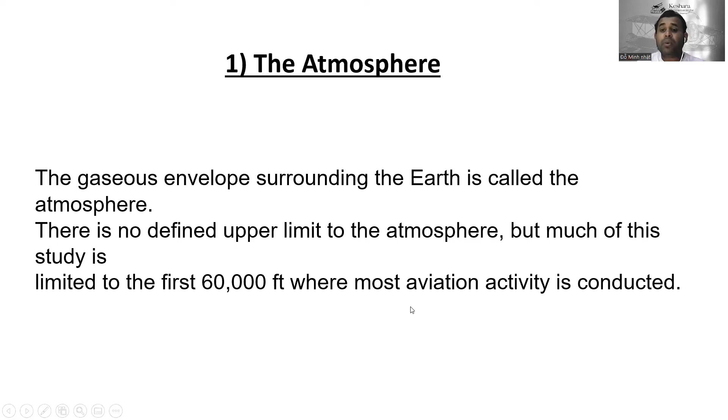So the gaseous envelope surrounding the earth is called the atmosphere. There is no defined upper limit to the atmosphere, but much of this study is limited to the first 60,000 feet where most aviation activity is conducted. Okay, so now number 2, gas composition.

The gases are found in the atmosphere in the following proportions by volume. For example, nitrogen is 78% in the atmosphere, oxygen is 21%, and other gases are 1%, for example argon, carbon dioxide, water vapor.

So oxygen is essential for the sustenance of life and the combustion of materials. In the context of aviation, oxygen is required for the combustion of fuel, and a deficiency of this gas results in incomplete burning and reduced engine efficiency.

So water vapor is present in the atmosphere in varying proportions and is responsible for the weather around the earth, which in turn affects aircraft operations and performance. Additionally, the presence of water vapor may cause icing of the airframe or engine, which may impair aircraft performance.

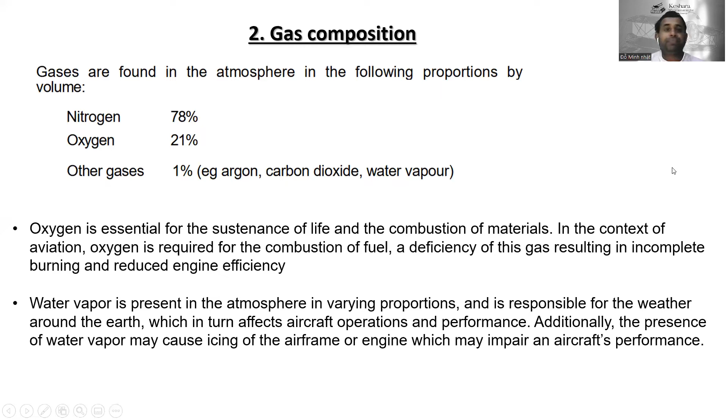Okay, so now the third one is regions of the atmosphere. The atmosphere is divided into several layers. The first layer is the troposphere, where the temperature decreases with increase of height. Remember, with increase of height, the temperature decreases. In this region, nearly all significant weather occurs, in the troposphere.

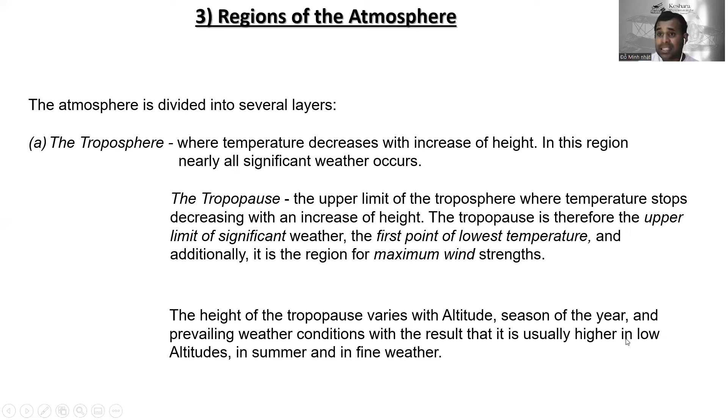So the tropopause is the upper limit of the troposphere, where the temperature stops decreasing with increasing height. The tropopause is therefore the upper limit of significant weather, the first point of lowest temperature, and additionally it is the region of maximum wind strength. The height of the tropopause varies with latitude, season of the year and prevailing weather conditions, with the result that it is usually higher in low latitudes, in summer and in fine weather.

Okay, so the typical heights for the tropopause are: this is the latitude and this is the tropopause height. At the equator, 16 to 17 kilometers, given in feet as 53,000 to 57,000 feet. At 45 degrees north and south, 10 to 12 kilometers. And at the poles, North Pole and South Pole, 7.5 to 9 kilometers, 25,000 to 29,000 feet.

And the second layer, the stratosphere, extends from the tropopause to approximately 50 kilometers AMSL. AMSL means above mean sea level, and it is characterized by the temperature being steady or increasing with height.

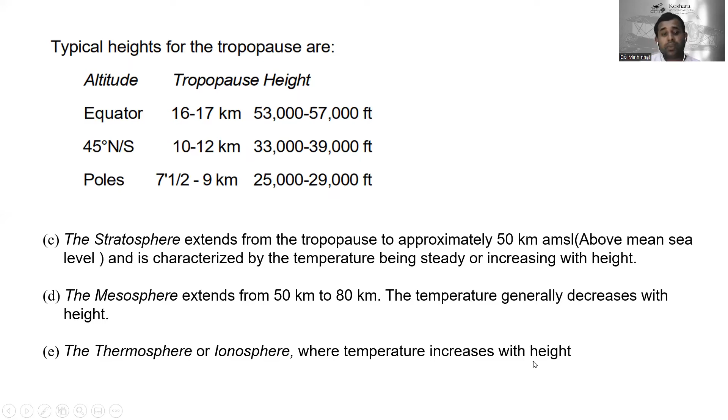So the mesosphere extends from 50 kilometers to 80 kilometers. In the mesosphere also, the temperature generally decreases with height. All right. So the thermosphere or the ionosphere, where temperature increases with height. Remember, in the ionosphere or thermosphere, temperature increases with height.

All right. So now we'll learn about temperature units. The temperature scales most used are Celsius or centigrade, Fahrenheit, and Kelvin or absolute temperature. The first two scales are based on the melting point of ice, being 0 Celsius and 32 Fahrenheit respectively. So 32 Fahrenheit equals 0 Celsius; that is the melting point of ice. And the boiling point of water being 100 Celsius or 212 Fahrenheit.

Being a form of energy, heat is related to the random movements of molecules in substances. If heat is reduced, the molecules become less active. The minimum temperature to which a substance can be reduced is approximately minus 273 Celsius, and this is known as absolute zero, or 0 Kelvin. Correspondingly, the melting point of ice is equivalent to 273 Kelvin and the boiling point of water to 373 Kelvin.

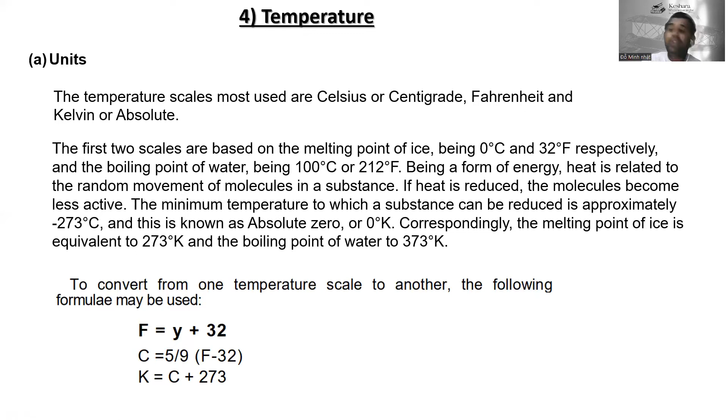So to convert from one temperature scale to another, the following formula may be used. If you want to convert Celsius to Fahrenheit, Fahrenheit to Kelvin, or Celsius to Kelvin, we can use this formula: F equals 9/5 C plus 32. To convert Fahrenheit to Celsius, C equals 5/9 times (F minus 32). To convert Celsius into Kelvin, we add 273. To convert Kelvin to Celsius, you subtract 273.

Next, temperature variations in the troposphere. At ground level, in general, the temperature increases with decrease of altitude, or with the increase of altitude the temperature decreases. With increasing altitude, the conductive and convective effects from the earth are reduced, so that temperature will usually decrease with height up to the tropopause.

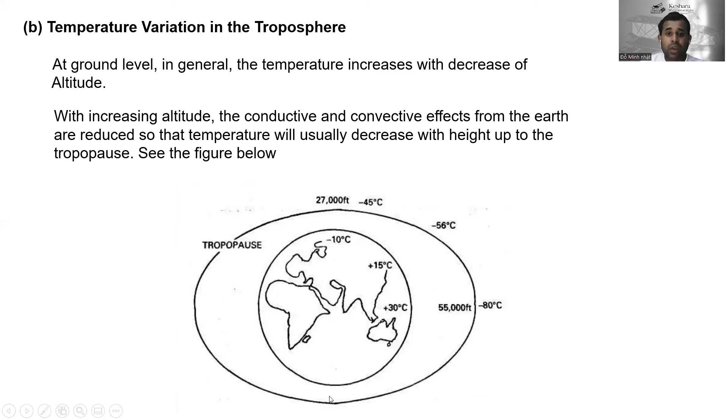See the figure below. This is the earth and this is the tropopause. Typical values of the temperature found at the tropopause are: at the equator, minus 80 Celsius; at 45 degrees north and south, minus 56 Celsius; and at the poles, the north pole and south pole, minus 45 degrees Celsius.

Therefore, there is a reversal of temperature with altitude in comparison to those found at ground level. This is partly because the tropopause is higher at the equator and the temperature decrease is effective over a greater height.

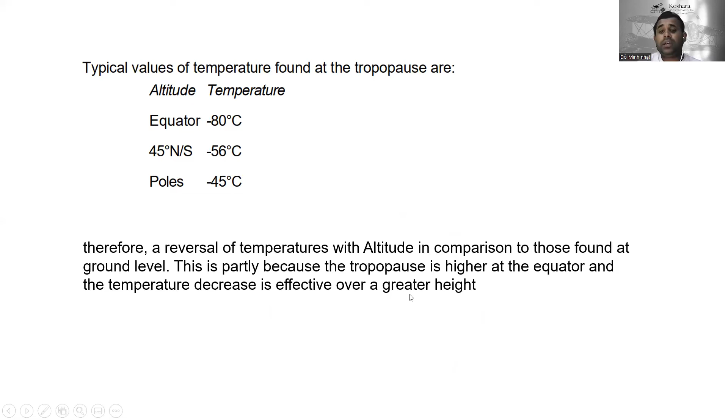Now let's go to the lapse rate. The temperature decrease with increase of height is referred to as lapse rate. It means when the height increases, the temperature decreases. A representative value of 2 Celsius per 1000 feet is a typical value for the troposphere, and this figure is used as the reference for the Jet Standard Atmosphere, JSA. The International Standard Atmosphere uses the comparable value of 1.98 Celsius per 1000 feet.

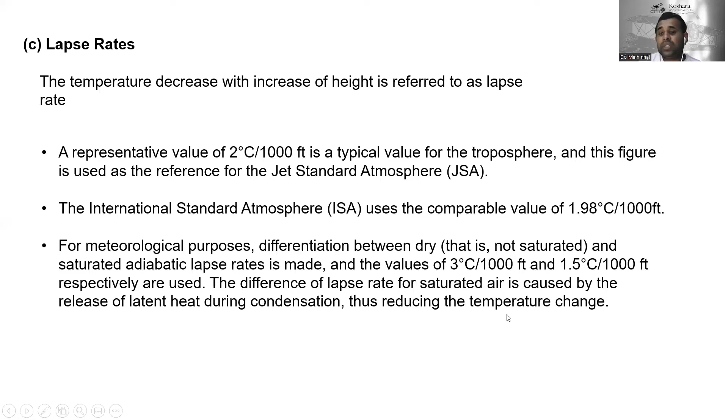For meteorological purposes, a differentiation between dry, that is not saturated, and saturated adiabatic lapse rate is made, and values of 3 Celsius per 1000 feet and 1.5 Celsius per 1000 feet respectively are used. The difference in lapse rate for saturated air is caused by the release of latent heat during condensation, thus reducing the temperature change. Just read these things, okay?

Alright, so next, temperature and aircraft performance.

Temperature and aircraft performance. At a given pressure, an increase of temperature results in reduction of density. Remember, at a given pressure means pressure is constant, and temperature increases. If the temperature increases, the result is the density decreases, right? It means the pressure is constant and temperature increases, then density is going to decrease, right?

So firstly, considering airframe performance, a reduction of density, this is the density, reduces lift, L. This may be counteracted by increasing the true airspeed, V, to achieve the required amount of lift. Okay, so this is the equation. CL means the coefficient of lift. So L means the lift, and this is the coefficient of lift, times half density times true airspeed squared times S. All right.

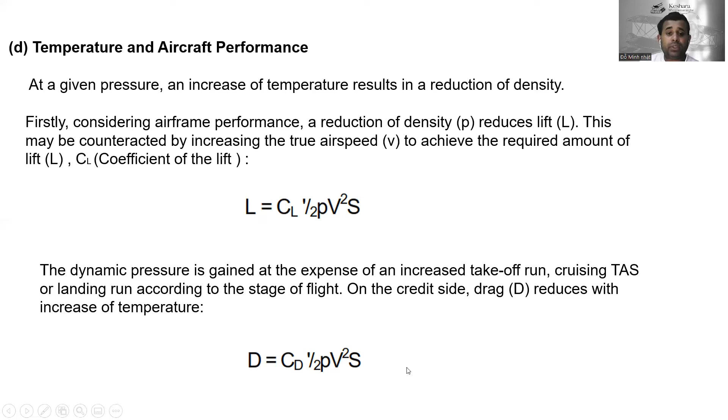So the next one is the dynamic pressure is gained at the expense of an increased takeoff run, cruising true airspeed or landing run according to the stage of flight. On the credit side, drag reduces with the increase of temperature. So this is the drag equation. So this is the lift equation.

A piston engine's performance is related to the temperature of the air being drawn into the cylinder head. The higher the temperature, the lower the density and the weight of the fuel-air mixture that can be burned in the combustion chamber. The power output of the engine therefore falls with the increase of temperature. Remember, the power output of the engine therefore falls with increase of temperature.

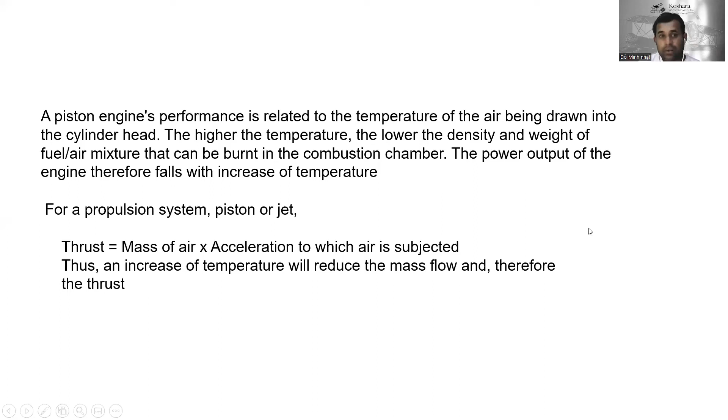Remember. For a propulsion system, piston or jet, thrust equals mass of air times the acceleration to which the air is subject. So this is an equation. Remember, thrust equals mass of air times acceleration. Thus, an increase of temperature will reduce the mass flow and therefore the thrust. All right.

Okay, so the next one, definitions, the pressure. Now we're going to learn the pressure. The definition is pressure is the force exerted on a unit area. In a unit area, the force exerted is called pressure. So the equation is pressure equals force divided by area. Force we can again split into force equals mass times acceleration. So the pressure equals mass times acceleration divided by area.

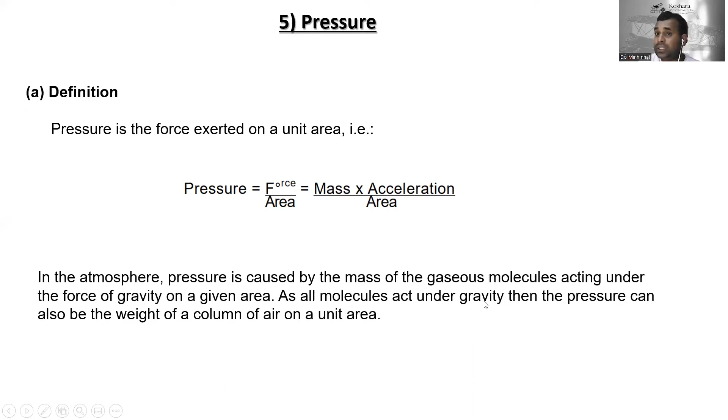So in the atmosphere, pressure is caused by the mass of gas molecules acting under the force of gravity on a given area. As all molecules act under gravity, the pressure can also be the weight of a column of air on a unit area. Alright, so this is the figure. You can see the unit area, the column of air. So this is the pressure exerted onto the earth, or the floor, right?

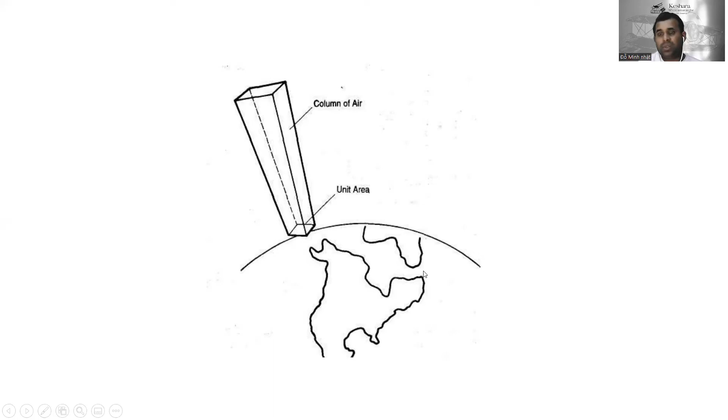So now the units. The metric units of pressure are dynes per square centimeter, where the dyne is the force required to accelerate 1 gram by 1 centimeter per second. The System International units of pressure are newtons per square meter, where the newton is the force required to accelerate 1 kilogram by 1 meter per second.

The newton is therefore equal to 10 to the power 5 dynes. Remember, 1 newton is equal to 10 to the power 5 dynes. Just remember these things. Maybe they will ask in the examinations, right? Although largely obsolete, the imperial system of units is still encountered and pressure is expressed in pounds per square inch. In meteorology, the unit of pressure is the millibar, which is equivalent to 1000 dynes per square centimeter.

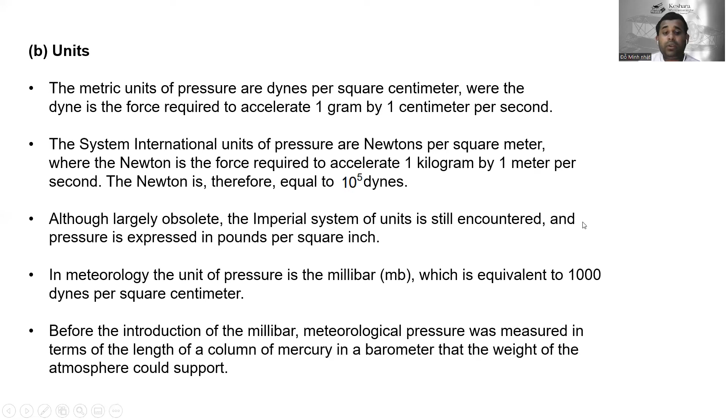Before the introduction of the millibar, meteorological pressure was measured in terms of the length of the column of mercury in a barometer that the weight of the atmosphere could support, all right? Okay, so this is the variation of pressure in the atmosphere. At sea level, pressure generally varies between 950 and 1050 millibars. However, in tropical revolving storms and tornadoes, pressure may fall much lower.

With increasing altitude, the mass of overlying air decreases and so the pressure falls. Pressure values of the International Standard Atmosphere are given below. You can pause this video and go through this table, just to get an idea. From the table, it should be noted that at about 18,000 feet, the pressure is half of the sea level value.

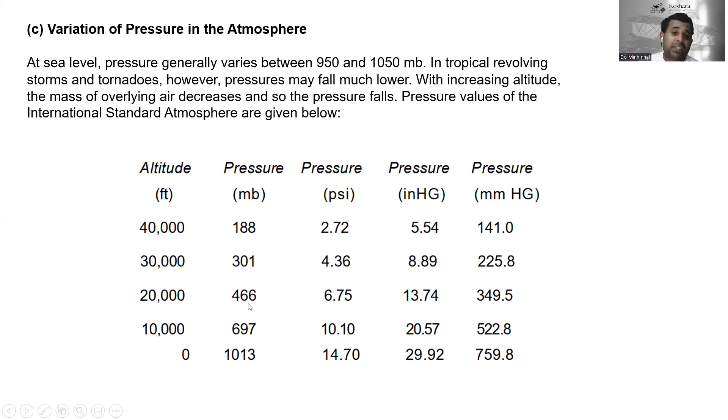Let's see, at 10,000 the pressure is 697 millibar. Or at 20,000, the pressure is 466 millibar. At sea level, the pressure is 1,013. So at 18,000, we can see the pressure will be half of this value, right? So that is what they explain.

So it should now be apparent that the rate of pressure decrease with height. Remember, from the previous table you can get to know the pressure is decreased with the increase of height. The rate is not constant. In the first 10,000 feet, the pressure falls at a rate of approximately 1 millibar per 30 feet, but between 30,000 feet and 40,000 feet, the pressure decrease is closer to 1 millibar per 88 feet.

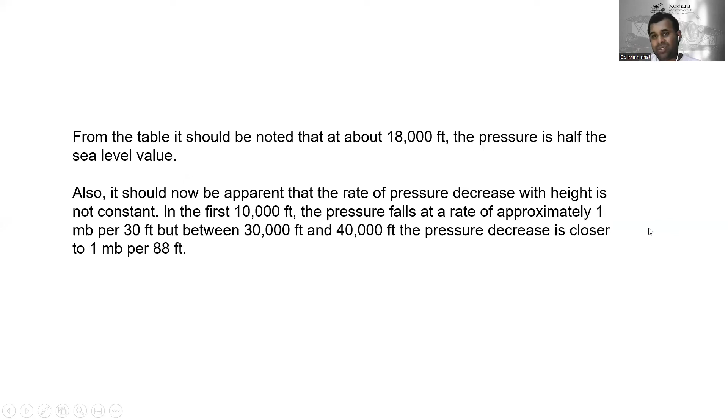Okay. Right, so now go to the pressure altitude. The altitude at which a given pressure occurs in the International Standard Atmosphere is called the pressure altitude. Remember, the altitude at which a given pressure occurs in the International Standard Atmosphere is called the pressure altitude. If, for example, the pressure at the top of Mount Everest were determined as 300.9 millibar, then the pressure altitude would be 30,000 feet.

Assuming the same mean sea level condition and two columns of air of the same height but differing temperatures, the cold air would have a greater mass than the warm air due to the density difference. The pressure of the atmosphere, however, is caused by the mass of overlying molecules on a unit area. The pressure above the column of warm air is therefore higher than that above cold air. Because a higher pressure is found at a lower level, the pressure altitude above warm air is lower than the pressure altitude above cold air.

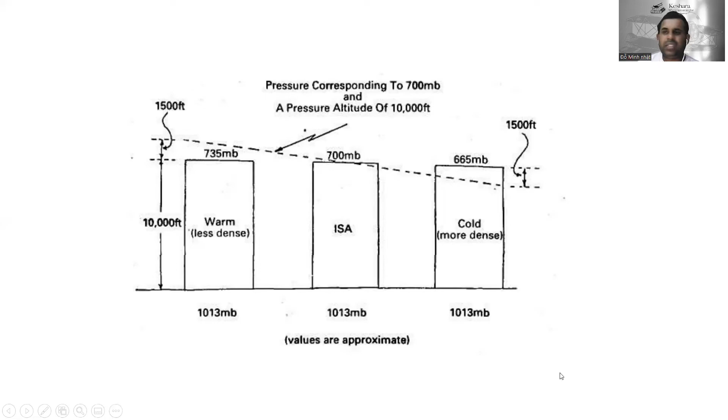Alternately, it can be expressed that the true altitude of an aircraft is more than that indicated, assuming the correct mean sea level pressure has been set on the subscale, above warm air and less than that indicated above cold air. Okay, so you just read this one and get an idea. Alright, so this is the table. Values are approximate. You can go through this table and also read this paragraph. Then you will have a better idea about the pressure altitude.

Alright. So now let's go to density. The definition is: density is the mass per unit volume of substance at a specified temperature and pressure. Remember, density is the mass per unit volume of substance at a specified temperature and pressure. So this is the equation for density: density equals mass over volume. Density is expressed in grams or kilograms per cubic meter for metric or SI units respectively. The imperial units are pounds per cubic feet.

Factors affecting density: when considering gases, density equals pressure over gas constant times absolute temperature, right? So for a given temperature, an increase of pressure increases density, or at a given pressure a decrease in temperature increases density.

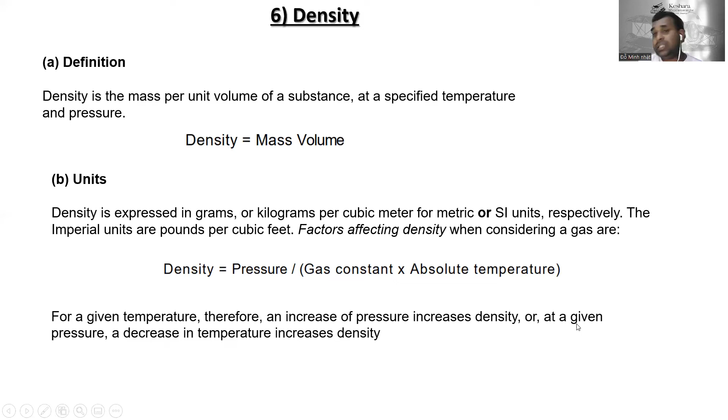Alright, so now let's go to the variation of density in the atmosphere. At sea level, densities vary between 1.20 and 1.55 kg per cubic meter, the higher values usually associated with the colder temperatures of high latitudes and the lower values typical of equatorial latitudes. Air at lower levels in the atmosphere is compressed by the mass of the overlying air. With increasing altitude, the overlying mass reduces and air can now expand, resulting in further reduction of pressure.

With increasing altitude, the temperature also decreases, but at a rate lower than the pressure. Remember, the rate of decreasing pressure is higher than the rate of decreasing temperature with increasing altitude. Okay, density therefore decreases with height.

Density values of the International Standard Atmosphere are shown below. So you can see the density value, right? At 40,000 feet, the density is 0.301 kilograms per cubic meter. At 30,000 feet, the density is 0.458 kilograms per cubic meter. At about 22,000 feet, the density is half the sea level value. We have already seen that the density at sea level tends to be higher at the poles than at the equator. However, at 26,000 feet, the density value is similar at all latitudes, right?

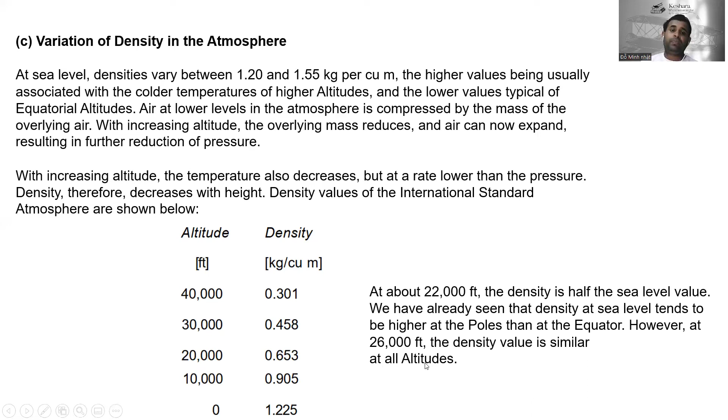Okay. So now let's go to the variation of density with humidity. The total pressure of the atmosphere is equal to the sum of the individual pressures of the gases. The pressure of moist air is less than that for dry air, and so humidity decreases the total pressure. From the gas equation, it can be seen that the reduction in pressure results in a lower density. The greater the humidity, the lower the density.

Alright, so now remember, the greater the humidity, the lower the density, right? It means if the humidity is higher, the density is lower. So the density altitude is defined as the altitude in the international standard atmosphere at which a given density is found. Aircraft performance is largely dependent on density altitude as opposed to true or pressure altitude.

Density and performance. The effects of density on lift, drag, power, and thrust have been considered in the sections concerning temperature. There are, however, additional effects on density performance above about 300 knots. Air becomes significantly compressed and locally increases the density at much higher speed. This may give a marked increase in drag, and when increasing altitude, this can offset the otherwise reducing drag values. A similar compressibility effect increases drag on a propeller blade, reducing its efficiency, particularly at higher altitudes. Okay. Jet engine performance, however, is enhanced by these compressibility effects as mass flow is improved.

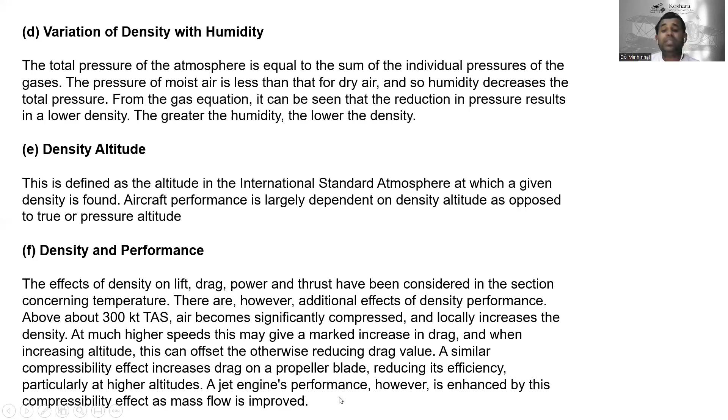Right? Okay, now the air density and the human body. The reduced density of air with increasing altitude means that in a given volume of air breathed in, the oxygen content has decreased. Okay, so above 10,000 feet, this reduction leads to hypoxia, right? So this is a little bit important. Its effects range from lack of judgment to sleepiness or collapse.

According to the height, at night the reduced intake of oxygen impairs night vision at altitudes of 4,000 feet and above. To counter these problems, aircraft operating above 10,000 feet must have an enriched oxygen supply. That's why it's pressurized. Okay, either in conjunction with a pressurized cabin or through face masks. At night, ideally, oxygen should be available from ground level upwards.

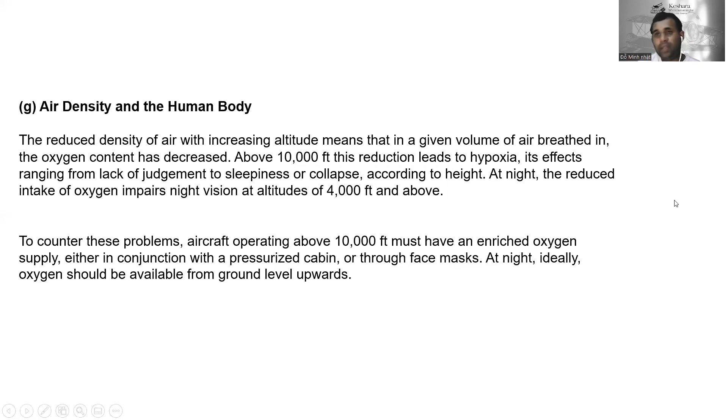All right. So now the performance ceiling. Remember, performance ceiling is service ceiling. This is defined as the altitude at which the rate of climb of an aircraft falls to a specified figure, usually 100 feet per minute. Okay, just go through this one because these kinds of things can be asked in the examination.

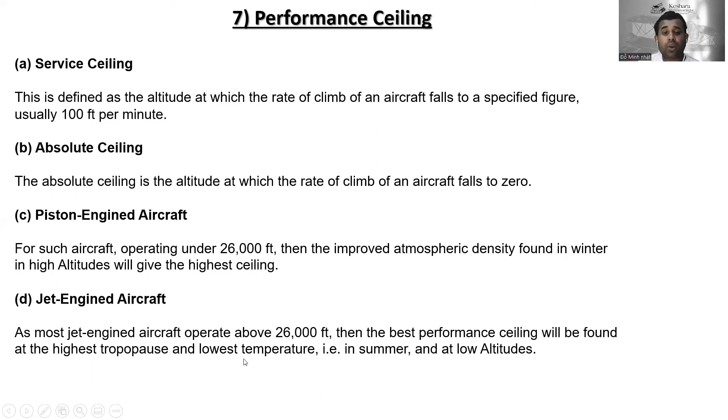So absolute ceiling. The absolute ceiling is the altitude at which the rate of climb of an aircraft falls to 0. Piston engine aircraft: for such aircraft operating below 26,000 feet, the improved atmospheric density found in winter at high altitudes will give the highest ceiling. Jet engine aircraft: as most jet engine aircraft operate above 26,000 feet, the best performance ceiling will be found at the highest tropopause and lowest temperature, okay, in summer and at lower latitudes.

Now the gas laws. Okay, this is also very important. From this section, I think for the examination, mostly they will ask about 2 to 3 questions, and from the gas law, they will definitely ask 1 or 2 questions, right? So the introduction: while air is not an ideal gas, it conforms within close limits to the results of Boyle's and Charles' law, right?

So Boyle's law, you remember Boyle's law: the volume V of a given mass of gas at constant temperature is inversely proportional to the pressure, right? See, V, the volume, is inversely proportional to the pressure. Okay, sorry, the volume of a given mass of gas at constant temperature. Yeah, the temperature is constant. When temperature is constant, the volume is inversely proportional to the pressure. That is called Boyle's law, right? So this can be expressed in this form: P1 V1 equals P2 V2, right? So you can just go through this one.

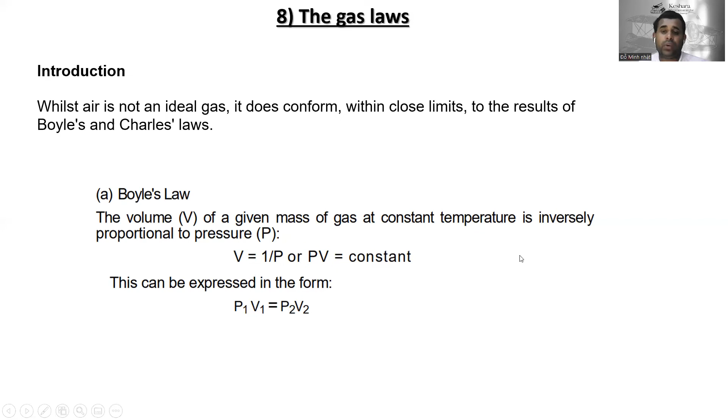And the next one, Charles' law: the volume of a given mass of a gas at constant pressure, right? In Charles' law, the constant is pressure, and in Boyle's law, the constant is temperature, right? It increases by 1/273 of its volume at 0 Celsius for every 1 Celsius rise in the temperature.

So in Charles' law, at a given constant pressure, volume rises with a rise in temperature. So V divided by K equals a constant, right? So it means volume is directly proportional to the temperature at a given pressure. So that is Charles' law. It can be alternatively expressed as below, which is also useful: V1 divided by K1 equals V2 divided by K2. K means the temperature; they express it in Kelvin, right? So this is the temperature.

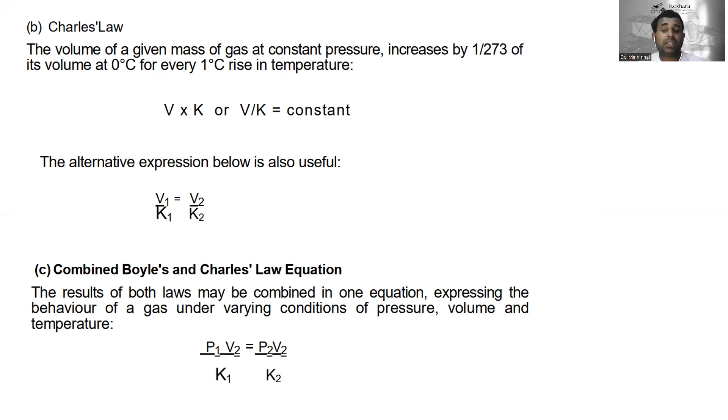So the combined Boyle's and Charles' law equation. The results of both laws may be combined in one equation expressing the behavior of a gas under varying conditions of pressure, volume, and temperature. So this is the combination of Charles' and Boyle's law: P1 into V1 divided by K1 equals P2 into V2 divided by K2. This is the combined Boyle's and Charles' law. From these gas laws, for the examination, they can ask some questions, right?

Okay, so the next one, International Standard Atmosphere. In order to provide a datum for aircraft performance comparison and instrument calibration, an assumed set of conditions has been determined. While representative, these conditions do not necessarily reflect actual conditions in the atmosphere. The values used are listed below. The temperature is 15 Celsius at mean sea level, decreasing at 1.98 Celsius per 1000 feet to 36,090 feet or 11 kilometers, where the temperature remains constant at minus 56.5 Celsius until 65,617 feet or 20 kilometers. Pressure is 1013.25 millibar at mean sea level. Remember this one. And density is 1.225 kilograms per cubic meter at mean sea level. This is the International Standard Atmosphere.

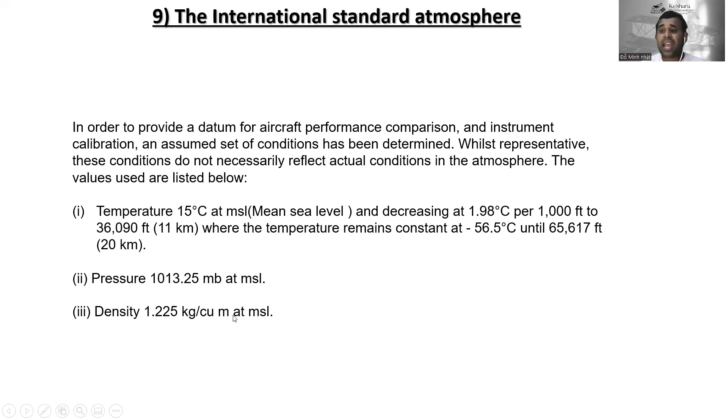Okay. So the last one is speed. Indicated airspeed, IAS. The dynamic pressure of air against a vehicle, or indicated airspeed, is equal to ½ρV², where ρ is density and V is true airspeed. An airspeed indicator calibrated to ISA mean sea level conditions records the dynamic pressure as a speed. If, for example, the indicated reading were 200 knots, then the dynamic pressure is the same as it would be at a true airspeed of 200 knots at standard conditions at mean sea level.

Alright. Next, rectified airspeed, RAS. Rectified airspeed is the indicated airspeed corrected for instrument and position errors. Next, equivalent airspeed: the rectified airspeed corrected for compressibility. It should be noted that compressibility is always a subtracted quantity. Next, true airspeed: the equivalent airspeed corrected for density. And calibrated airspeed: some airspeed indicators are corrected for mean sea level compressibility; calibrated airspeed is the value of this reading corrected for instrument and position errors. And the Mach number is the ratio of true airspeed to the local speed of sound. This is the Mach number.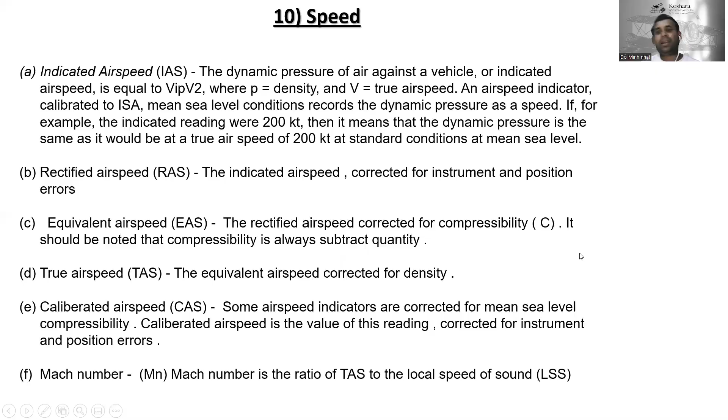That is the end of this lesson. In this lesson you learned the atmosphere, the gas composition, regions of the atmosphere, temperature, pressure, density, performance ceiling, gas laws, International Standard Atmosphere, and also speed. This is the first lesson of EASA Module 8 aerodynamics. In the next lesson, lesson number 2, I will teach you about aerodynamics and aerofoils.